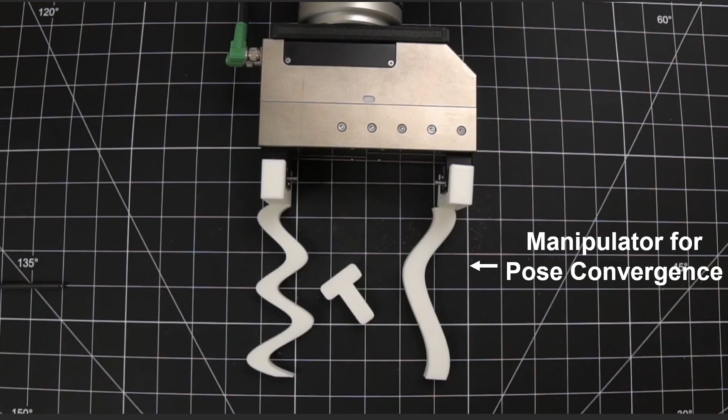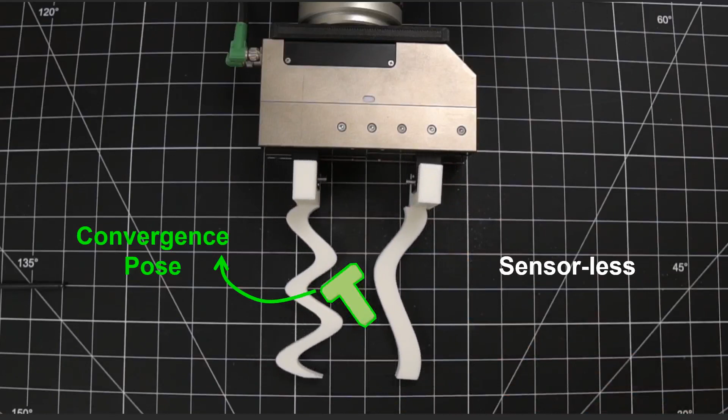We present dynamics-guided diffusion model for robot manipulator design. This is a robot manipulator designed for pose convergence of this target T object. It means no matter how you put down the T, the manipulator is always able to align the T to the same pose after a few squeezing actions, without sensors.

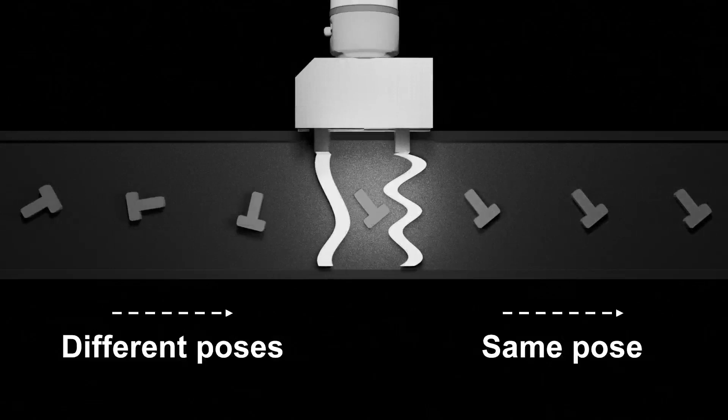As you can imagine, this manipulator can be quite useful in assembly lines. When objects are fed in with different poses, we can automatically align them to the same pose. Then the following robot can just blindly manipulate the object.

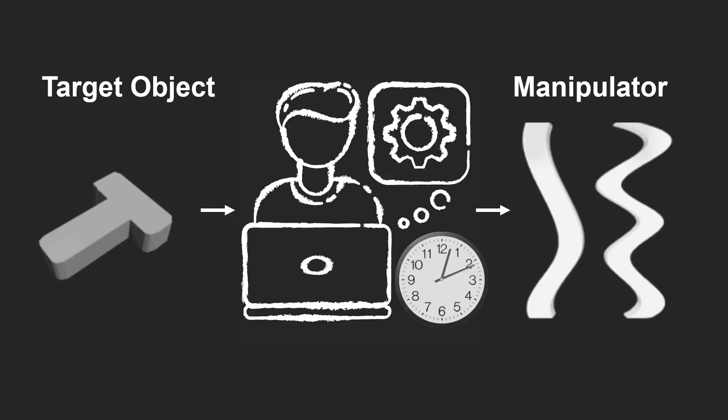But how can we come up with this robot manipulator design? If we're dealing with a different object, like a heart shape, the manipulator that can align it should look like this. And 3D objects require specific 3D manipulators to align. How do we come up with different designs for different objects?

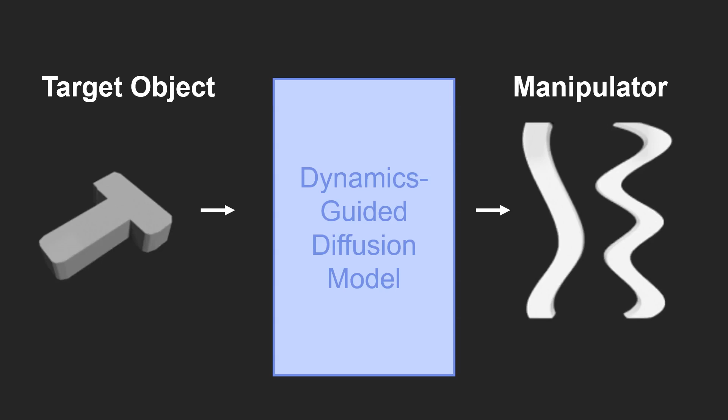This design process is so counterintuitive. It often takes a very experienced engineer days or months. In this work, we introduce dynamics-guided diffusion model to automate this design process with machine learning.

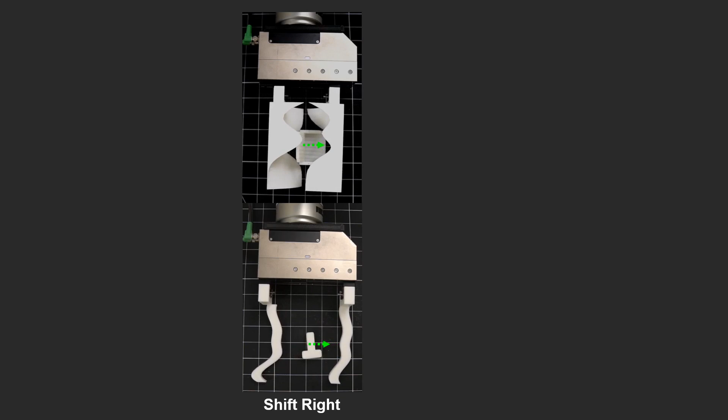Moreover, we not only generate manipulators that align objects, but also manipulators that can shift objects up, shift them down, right, left, rotate them counterclockwise and clockwise. The best part is, we generate all of these designs for different objects and different tasks with the same model.

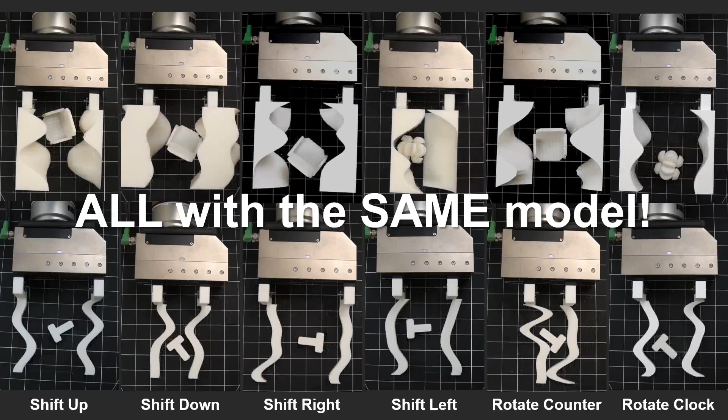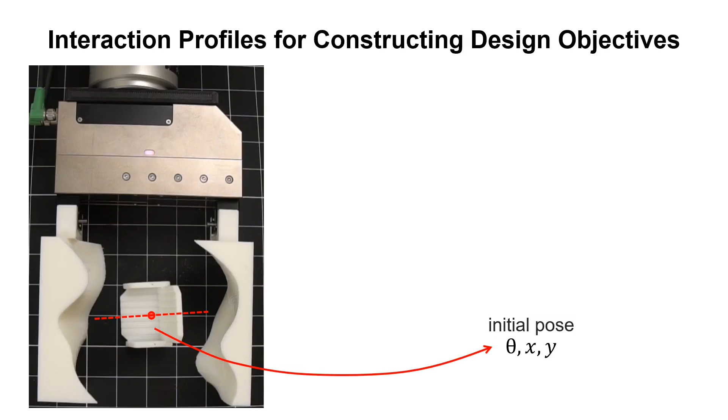How does it work? Here is an object interacting with a manipulator. The object starts with an initial pose. The manipulator closes in around the object, resulting in a delta pose change.

By sampling different initial poses and collecting the corresponding delta poses, we get an interaction profile describing how the object should move after interaction under different initial configurations.

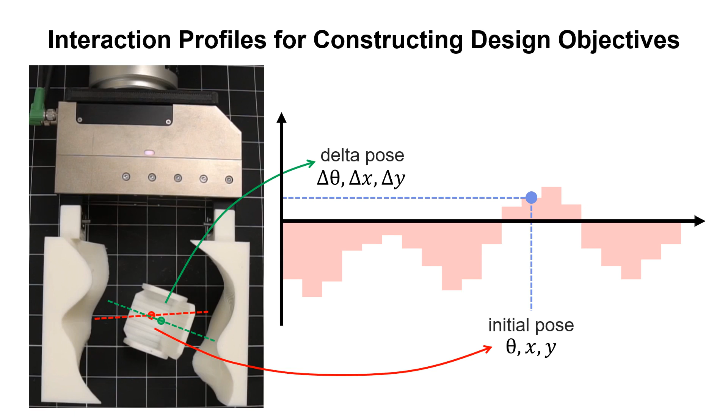Interaction profiles can then be used to construct design objectives. Take convergence as an example. The goal is to reorientate an object to a target orientation, say theta target, under any initial orientation.

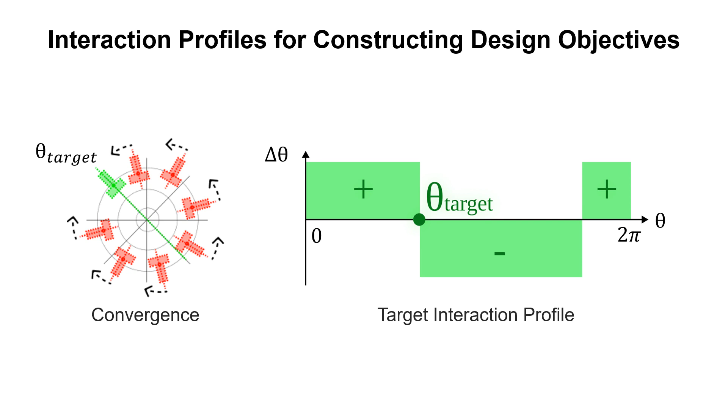So the object should rotate along the positive direction when its initial orientation is smaller than the target, otherwise rotate along the negative direction. Then the object's target interaction profile should look like this, with positive delta theta when theta is smaller than theta target, otherwise negative delta theta.

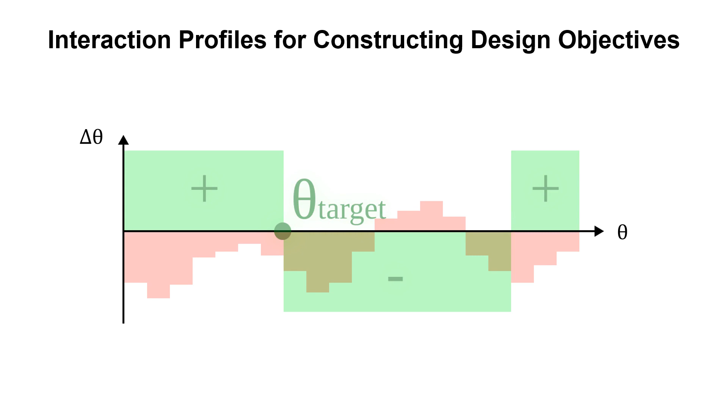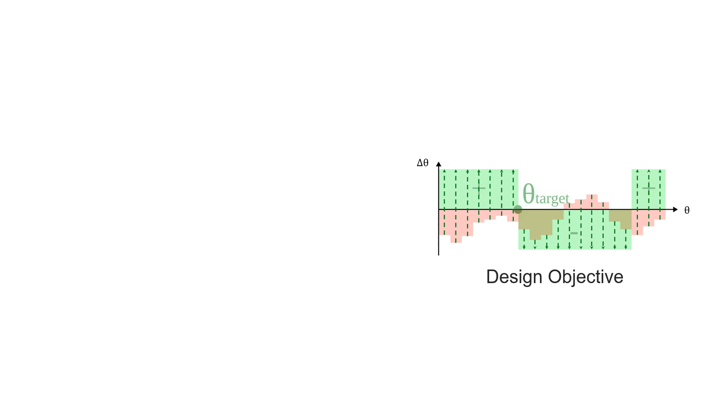Given the target interaction profile and the interaction profile of current fingers, we can easily construct a design objective to update the manipulator geometry. Given the design objective, how can we update finger shapes? In other words, how can we get the gradients of the design objective with respect to shape control points?

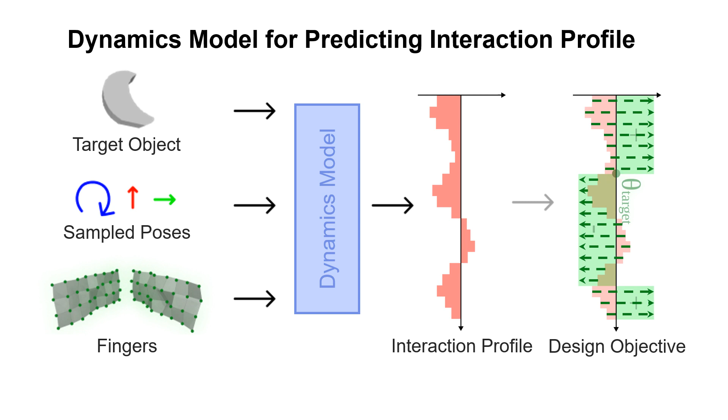We train a dynamics network to predict interaction profiles in a differentiable manner. The network learns a general model of how a random distribution of fingers interacts with the distribution of objects from simulated interaction data. Then the design objective can be constructed and gradients can be calculated.

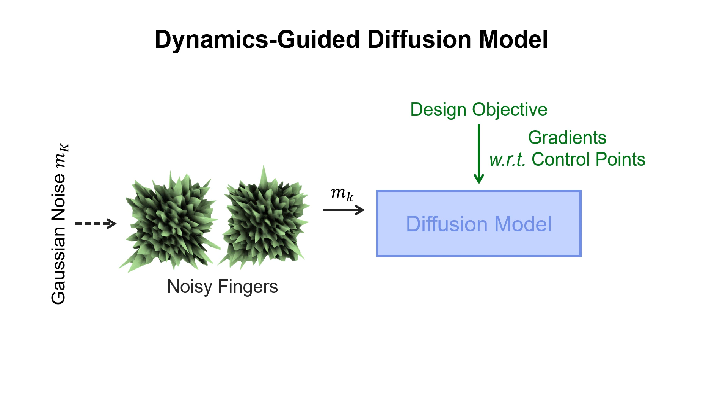With the gradients of the design objective, how can we efficiently generate good designs? We first train a manipulator shape diffusion model on the uniform distribution of control points. During the reverse denoising process, we use gradients of the objective for guidance. This process is then iteratively performed, and a task-specific manipulator can be generated within 0.8 seconds.

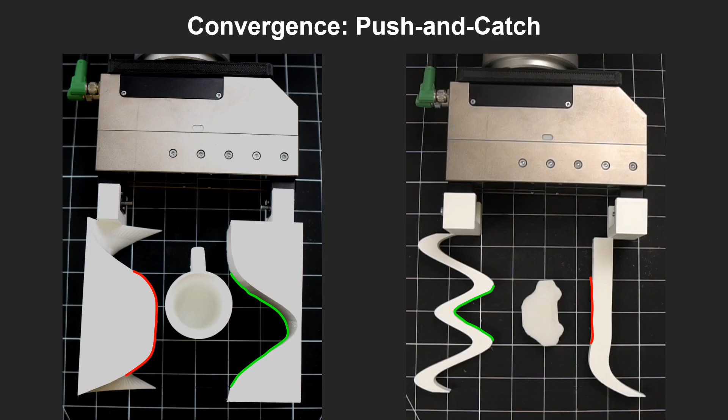What strategies do our automatically generated designs employ to achieve various tasks for various objects? We identify two emergent design patterns for convergence. The first strategy is push and catch, where one finger features a bulge that pushes the object into the hollow cavity of the other finger.

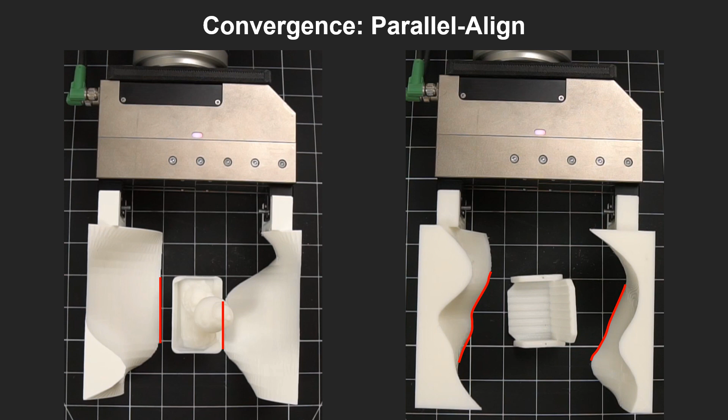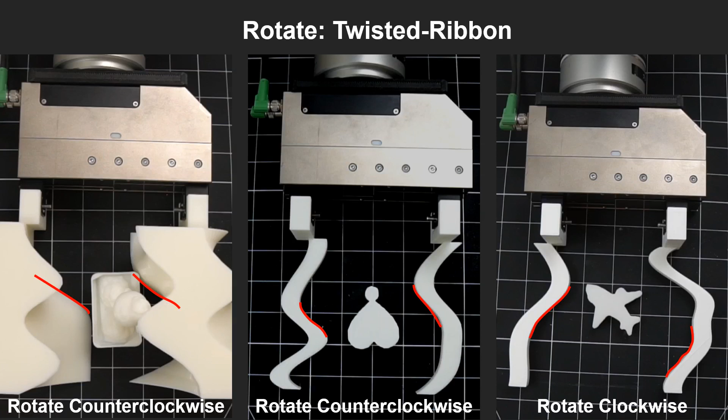Another strategy that the model automatically learns is parallel align. When objects exhibit symmetric flat edges, our designs utilize two parallel surfaces on each finger to align these edges. The shapes designed to perform rotational movements resemble twisted ribbons, curling in a rightward or leftward spiral.

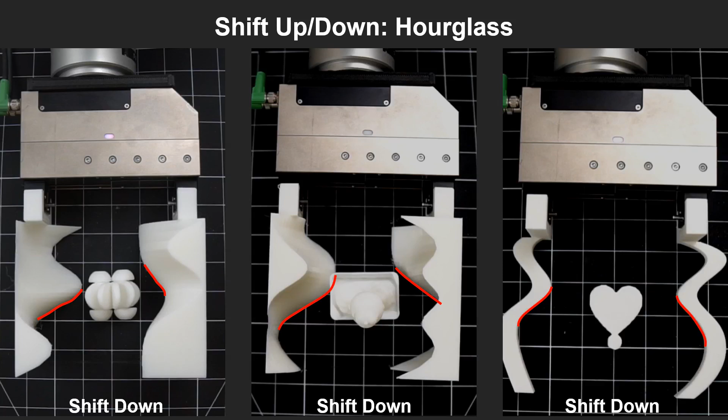For shifting up and down, the generated fingers resemble an hourglass. For shifting down, the shape presents a narrow top that gradually widens towards the base. For lateral movements, the designs exhibit an inward and outward pattern.